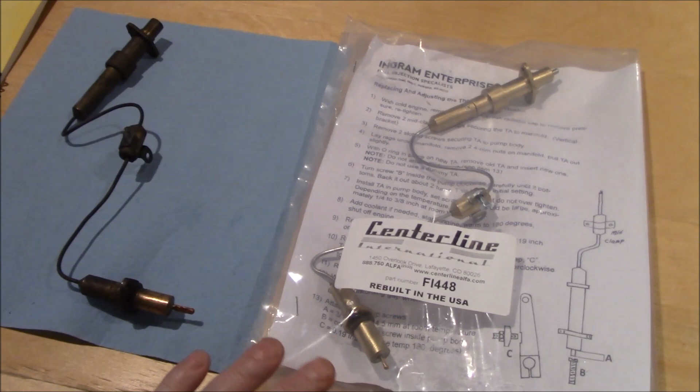All right, a little indoor project tonight. It's February the 1st, 2022, and we've got our brand new rebuilt thermostatic actuator back from Centerline Alfa. It's actually being rebuilt by Wes Ingram, Ingram Enterprises, you can see there, and we've got a host of directions to follow through. So let's unpack that and have a quick look at it, and we'll do a little bit of a test.

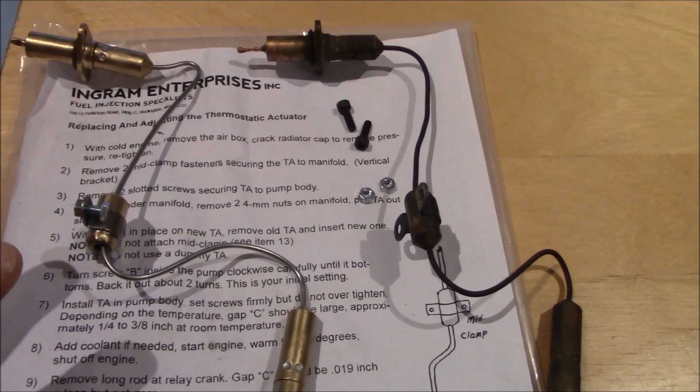All right, we've just unpacked the new thermostatic actuator, and you can see it in comparison here to the old one. And if you want to see me testing the old one, I'll put a link to the video up in the top right-hand corner of this video so you can see me testing the original and its failure. So here is the new one, and you can already see that the stick out is already pretty prominent there.

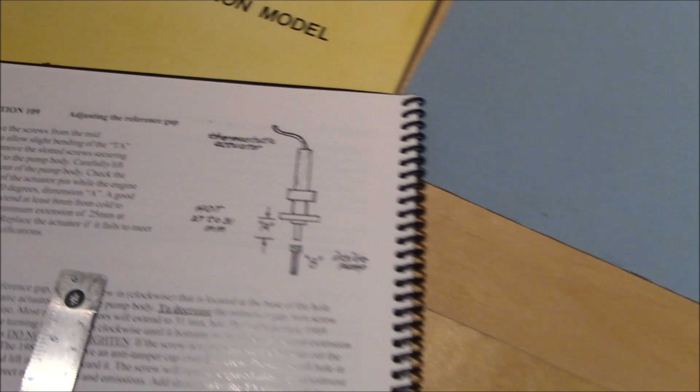So what we're going to do is the same test as we did on the previous video on the old one. We're going to test the new one and do some measurements on the room temperature stick out as it is now. And then once we submerge the end of it in some hot water, we'll actually see what the stick out actually should be. According to my Ingram manual over here on the Spica, it says this should be hot, extended, 27 to 31 millimeters. So let's see what the measurement is once we get this into some hot water.

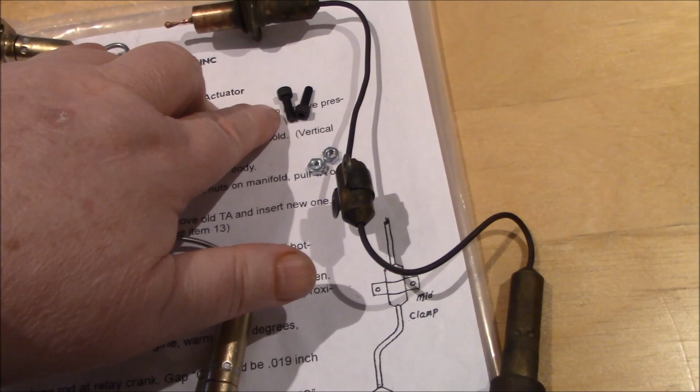Incidentally, before I go on and test this, I just wanted to point out that it's quite nicely packaged with all new hardware that you need to install this back on the car, which is quite nice. I thought I was going to have to reuse my old fasteners. It actually even has some machine head screws for the TA into the Spica body. If you wanted to go that route, it might be a little easier using the machine head screws and an Allen wrench. But anyway, it's got all of the directions for reinstalling and checking the reference gap, and we will talk a little bit more about that when we actually get to installing this on the car itself.

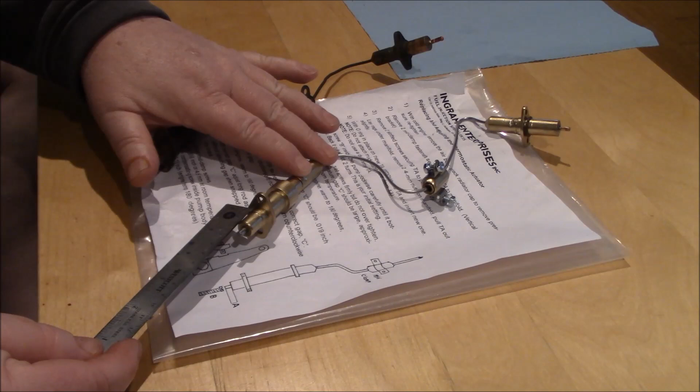All right, we've got the TA here in front of us, and we're just going to do a measurement on the stick out at room temperature. So as in my previous video, I'd mentioned that this stick out should be between 23 and 25 millimeters at room temperature. So if I take a quick measurement here from the flange, this one is actually 23 millimeters, so it's just at the minimum stick out.

So what we'll do now is we'll get our hot water and we will measure this with the other end, the temperature sensing bulb, in hot water, and see what the stick out ends up being. In the end, it should be 27 to 31 millimeters extended from this flange. So let's get the water out and we'll do that test.

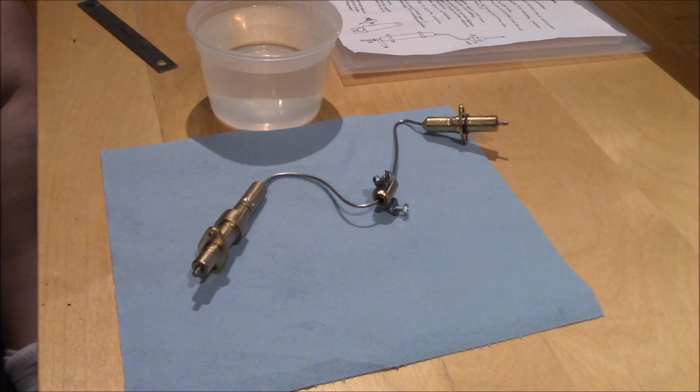All right, we've got our hot water standing by, so we're just going to stick the sensor end in, and we will watch the stick out move. And I'll try to do a little bit better job so you can actually see this in real time. So let's just pick this up. We'll handle it carefully. We don't want to bend anything. It's not that fragile, but anyway, hopefully you'll be able to see this. And let's see here if you can start to see that extending. So again, we're looking for an extension of 27 to 31 millimeters in total.

Let's take a quick measurement of where we're at. I would say we're at 28 millimeters, so it's working as it should. Hopefully you can see that. It's not exactly in focus, but hopefully you can see the stick out on that. So we're good to go as far as this working properly. So the next thing we'll do is actually install it in the car.

Well, Friday afternoon, another couple of days of snow, so I'm going to get out here and shovel again before too long.

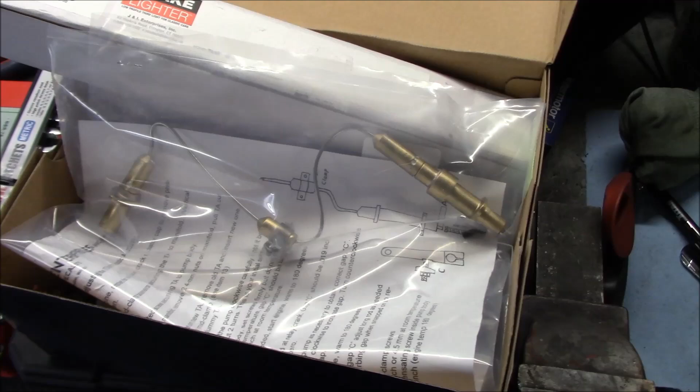Alright guys, as mentioned, it's Friday afternoon and we have a big weekend's worth of plans for the 1981 Alfa Romeo Spider Veloce project. The primary focus of the weekend is to get this new thermostatic actuator installed. And then we're going to play around with some lighting issues. We've got some third brake light options we're going to explore, and we've got some LED lighting for the taillights and the signal lights for the rear that we're going to explore, along with a few other things. So let's get started on prepping to get the TA installed into the car.

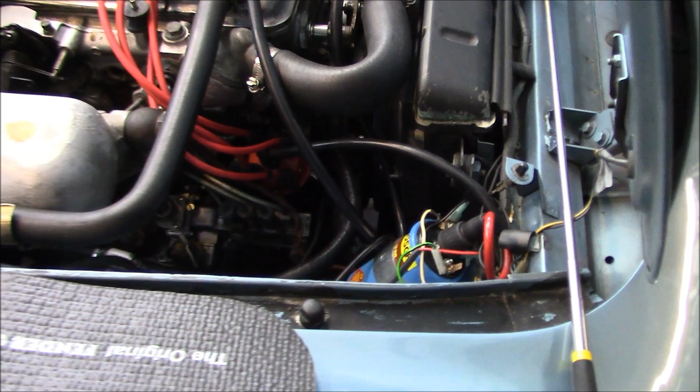All right, let's try to do a little bit of an overview of what we're trying to achieve here. I wanted to go over some of the things that are going to be a little bit of a challenge on this 1981. The first thing is this big plenum chamber here that was on 80s and 81s, I believe. This makes it a little bit more difficult space-wise to get down there and work on the Spica pump, and in particular the rear of the pump that I need to get to, and we'll show you what I'm talking about in a little bit.

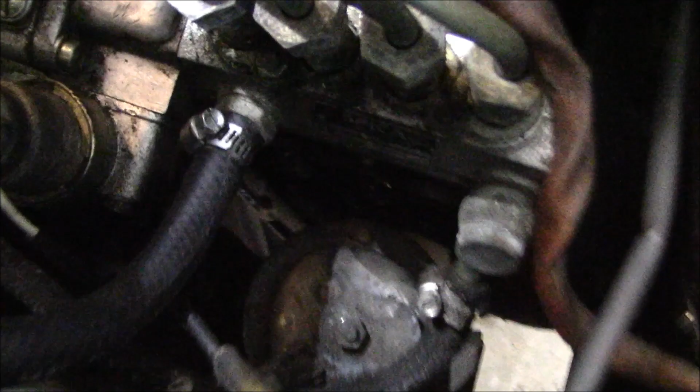But the first thing I wanted to take a look at was, and again, I'm not sure how much you're going to be able to see of this, but we'll try. I'm just trying to get to the hole where the thermostatic actuator actually goes in, and you can see a little screw in there. I believe you can anyway. On the 80 and 81, it sounds like there's an anti-tamper cap, and if you look in there, it looks like that cap is still installed, so this has never been adjusted previously.

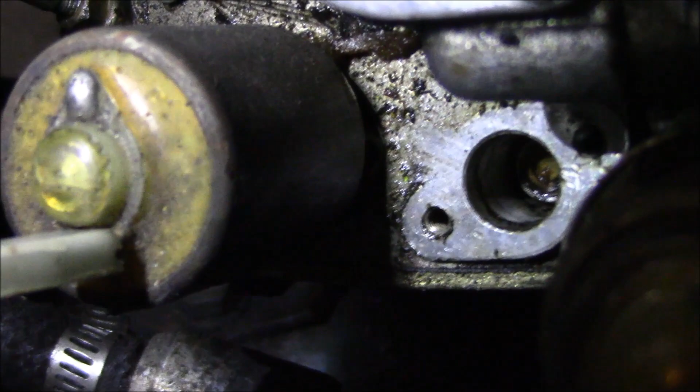Under that cap should be a slotted head adjustment screw that you can turn in and out, and that will change the reference gap at the rear of the pump that we'll talk a little bit more about in a minute. But I think you can see that. Anyway, I'm going to try to get that cap off and take a look at that, see if I can get the cap off first, and then we'll go from there.

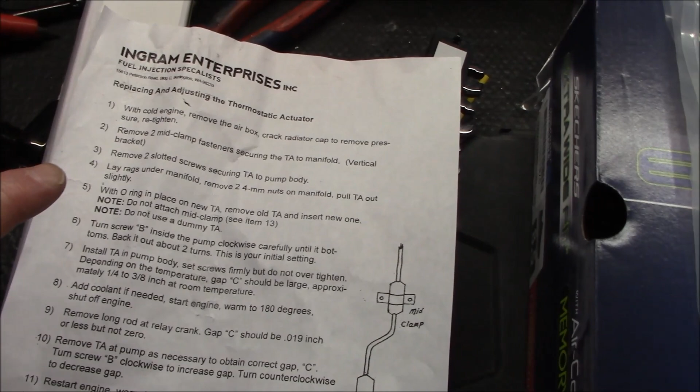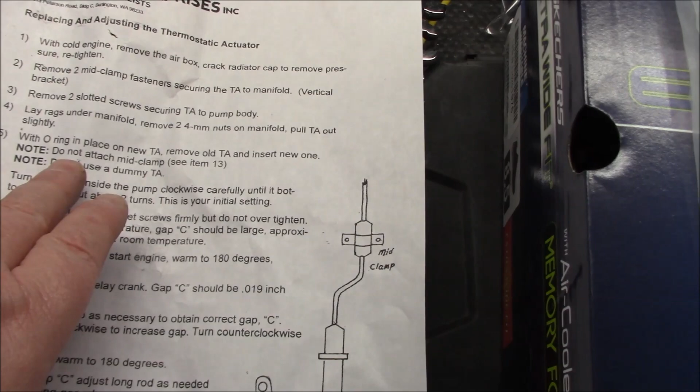All right, we're following the Ingram Enterprises installation instructions for the TA. So we're on point number 5, where we've actually removed the old thermostatic actuator, and we're going to put the new thermostatic actuator in place in the intake manifold and add the fasteners there. We're not going to use the mid clamp yet, because this may have to come in and out of the car. So we're going to skip point number 6.

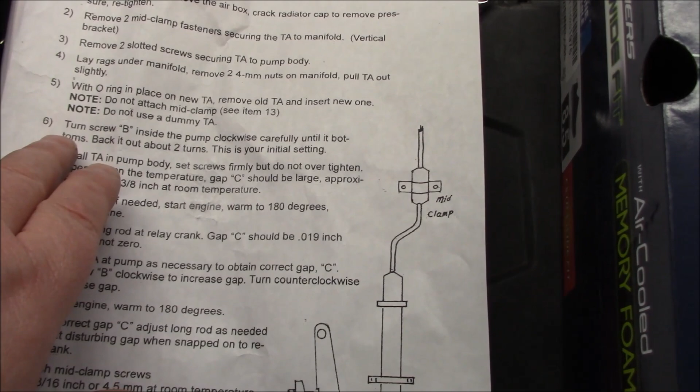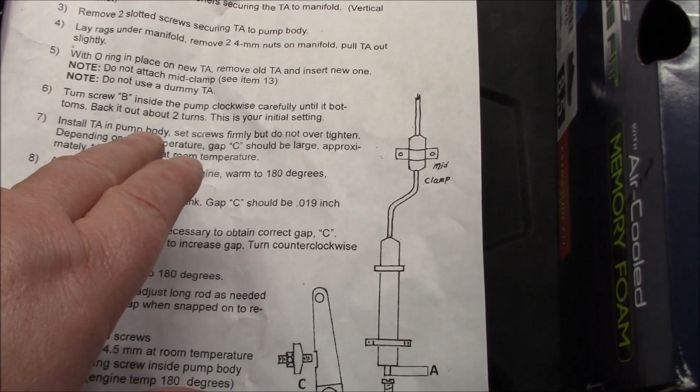I've decided not to play around with those anti-tamper screws or the caps on the adjustment screw within the Spica pump temporarily. We're going to just jump down to point number 7, and we're going to install the TA into the actual Spica pump body at the bottom. And they've sent me some nice little hex machine screws to be able to do that. So we're going to go ahead and do that, and we'll come back and give you an update.

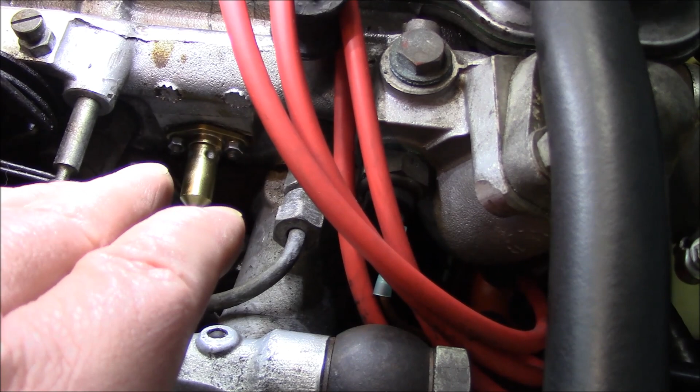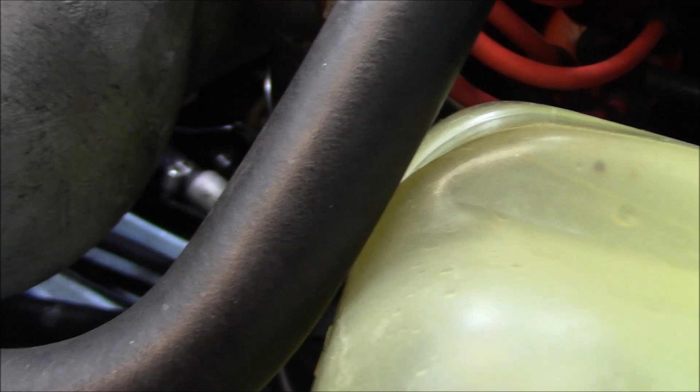As mentioned, the mid pipe clamp is not attached yet. Next step now is to put coolant back in, because we had to drain coolant to get this out. So I've bought some new coolant. I've got it sitting out in the car. We'll go grab that, add some coolant, and then we'll run this car up to temperature.

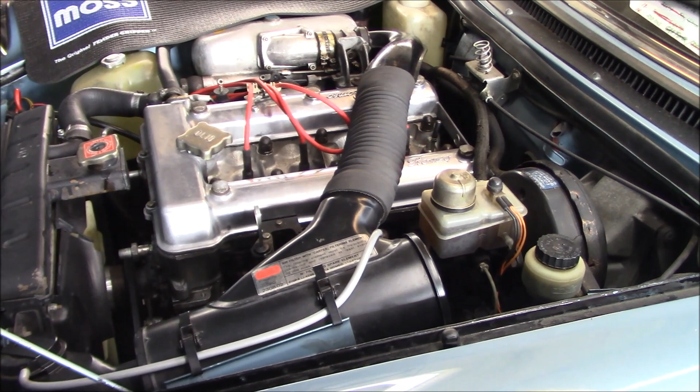All right, guys, Saturday morning, and we're picking up where we left off. Yesterday we had installed the thermostatic actuator, and then I got to a point where I wanted to start the car. The only problem was I didn't have enough fuel to be able to do that. The fuel light was staying on when I keyed the car, so I was having some low fuel pressure issues, which I attributed to not having any gas in the tank.

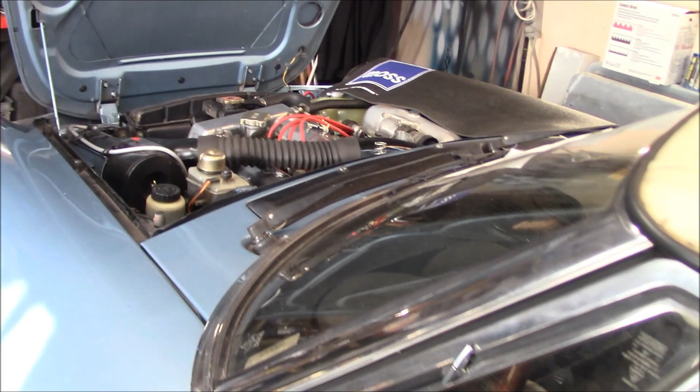So that meant that I had to go out last night, shovel the driveway, brush the car off, go get gas, and come back. And by the time I did that, it was about 10 o'clock at night. So I figured I'd just leave the cold start until today. So that's what we're going to do. So let me set you up on the camera.

It's definitely a cold start. It's 10 degrees or 11 degrees Celsius out in the garage. It's just over 50 degrees Fahrenheit. So let's see if this thing will start with the new thermostatic actuator installed. All right, not the best angle I know, but it's going to have to do.

All right, I charged the battery overnight because I hadn't charged it in quite some time, and I've been doing quite a bit of electrical testing and some cranks of the car, etc. So we charged the battery, and we've just hooked that back up. So let's get the key in here.

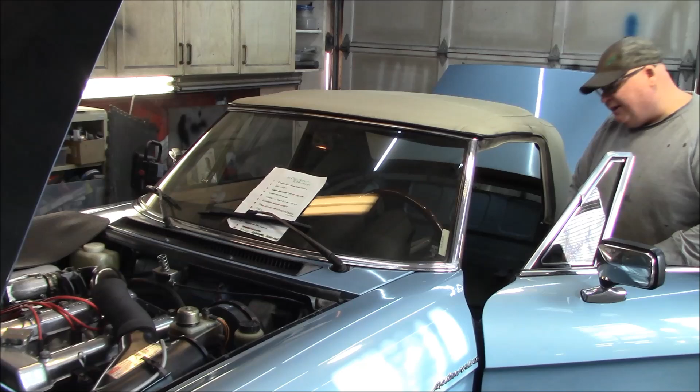And before you comment on the annoying buzzer, Doc, the new owner of this car, has told me that I can actually go ahead and take that buzzer out, or at least take the wiring off of it so it doesn't buzz anymore. But I haven't done that yet, so forgive the annoying buzz. All right. Alright, there you go.

So I'd forgotten that you need to depress the gas pedal about a quarter inch before you try to start the car. So here it is idling nicely. So we're going to let this come up to temperature. And as mentioned previously, I need to bring it up to temperature in order to check that reference gap at the back of the Spica pump. So the car needs to be plus 175 degrees Fahrenheit in order to do that. So we'll just let the car warm up here.

I'm going to crack the side door open. The garage door is frozen shut, so I can't get that door open. So let's crack the side door open. We'll let this warm up and we'll come back. And just for reference right now, I've got the throttle pulled on the dash here because we're warming the car up. And according to the manual, you want to warm the car up on the hand throttle for a few minutes before driving away.

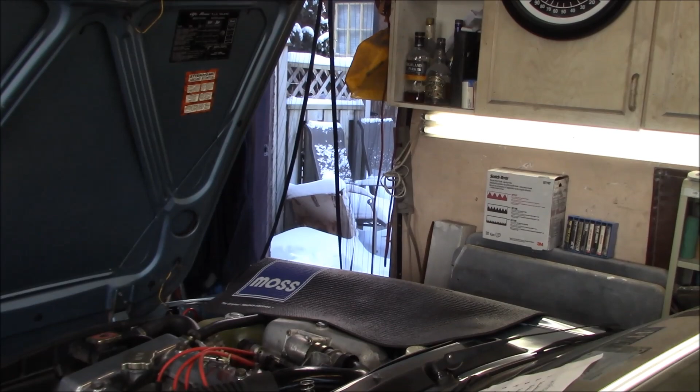So it's definitely cold out here, as mentioned. It's going to get colder now that the side door is open, and it's about minus 15 degrees Celsius outside. And yeah, I've got my shorts on out here, so it's a little breezy. Anyway, we'll let this warm up a bit before we push the throttle in and let it idle where it's going to idle at.

Alright, it's been a couple of minutes and the temperature is just coming up, as you can see. So let's push that throttle off. We're idling just about 900 now. Sounding pretty darn good, nice and smooth. Again, it's just barely heated up as well, so that's very, very good. Sounds excellent.

So what that new thermostatic actuator is doing is that when the car is in a cold condition, it sets the Spica pump up to run rich. And as the car heats up, that pin extends and acts on the rack within the pump, and it leans the mixture out. So as the car gets warmer, the mixture gets more lean. Running great. Very smooth.

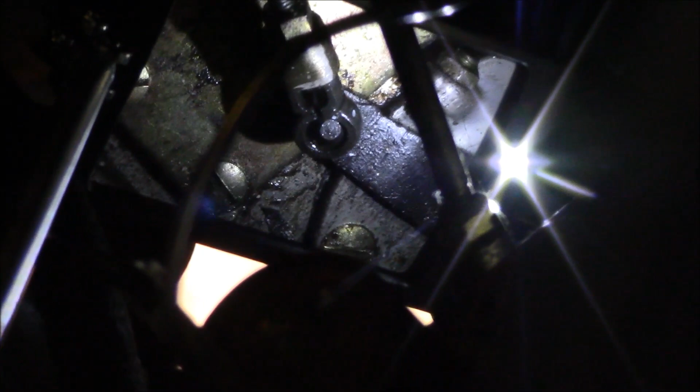Well, again, I'm not sure whether you're going to be able to see this or not, but there is the reference gap back there that we're looking to adjust. So it's going to be tough to get in there with a feeler gauge. So we got one standing by. You can see that gap is closed up significantly. The car's still not up to operating temperature. So we'll continue to run the car until it gets up there.

Alright, just coming up to operating temperature now. The car is running beautifully. Have a look inside here. I don't think it's going to get any hotter than this. Well, that's looking good.

So there's my idle. And again, this tach reads a little bit high. It's probably idling around 900. Could probably idle a little lower, but that's not bad at all. So the next step is to disconnect the long rod, which is the rod that connects the bell crank here.

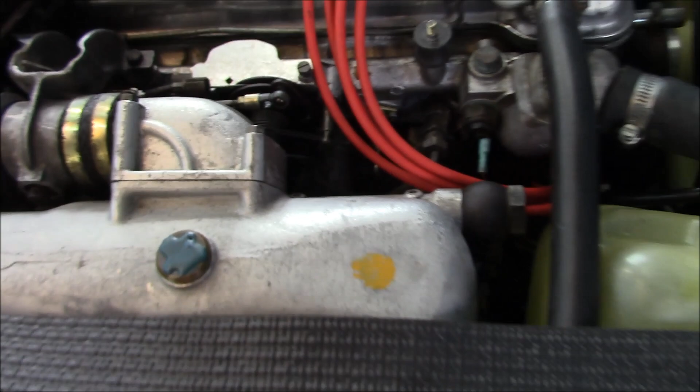Alright, I've disconnected the long rod, and that gap is almost, well, I can barely see it. Obviously I need to get a feeler gauge in there, but it looks to be almost zero at the moment with the long rod detached. Let's see if I can get a feeler gauge in there. Again, 0.19 feeler gauge. Let's see if I can get that down in there to measure it. And obviously when you reattach the long rod, you don't want to change the measurement down there, so you need to either shorten or lengthen the long rod to accommodate.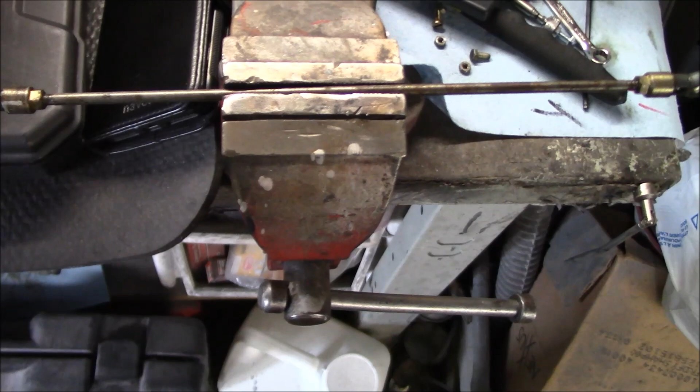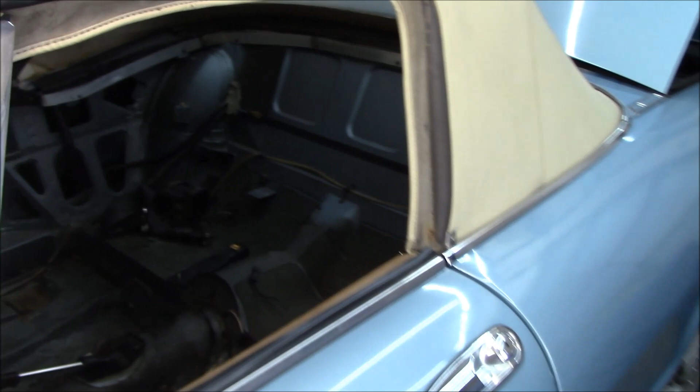Alright guys, we've got the long rod completely out of the car, and we just wanted to shorten it slightly, so we've shortened it a little bit, and we're going to go back and check the gap now and see where we're at. All right, guys, long rod back installed, reference gap checked. Seems to be running pretty well. We'll check it again. We're just running it back up to temperature. We'll check that measurement once more, but I think we're good. So idling just about right. The idle came down a tiny little bit.

All right, we'll call that done for now. I think we're going to do a little bit more tuning once we get the car out on the road in the spring. We'll do the seat of the pants test. But for now, I think we can move on. Like I said, we'll do one more reference check, and then that'll be it for now. We'll move on to some other little jobs.

All right, just before we move on to another project, I just want to mention that I did do up the middle clamp on the TA, so that's good to go in there now. And like I said, we'll play around maybe a little bit more with the tuning aspects of this once we get it on the road and do a little bit of driving in the spring. But for now, let's move on.

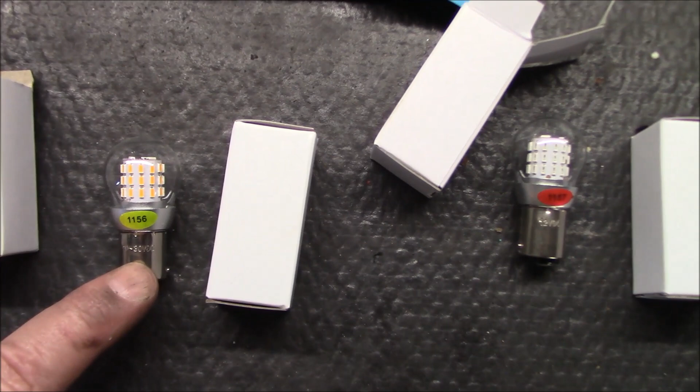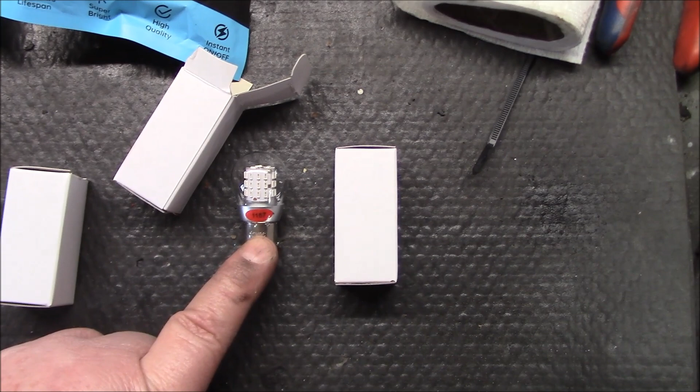All right, guys, we're just about to start the LED conversion in the rear of the car. So I've got a couple of different styles of bulbs here from a company called Alfa. These were purchased off of Amazon. We have a 1156 bulb, which is an amber LED, and you can see there's amber on the face and on the sides. And we have an 1157 bulb that is red LEDs, again, same face and sides. So the 1156 amber bulb will be used for the turn signal, and the 1157 red LED will be used for the running lights and brake light application.

I just wanted to mention from a brightness perspective that the stock bulbs are rated in candle power, and when I do the conversion from candle power to lumens that the new bulbs are rated in, the stock bulbs come out to be about 400 lumens. These are 600 lumens for both the turn signal and the running and brake lights, so significantly brighter.

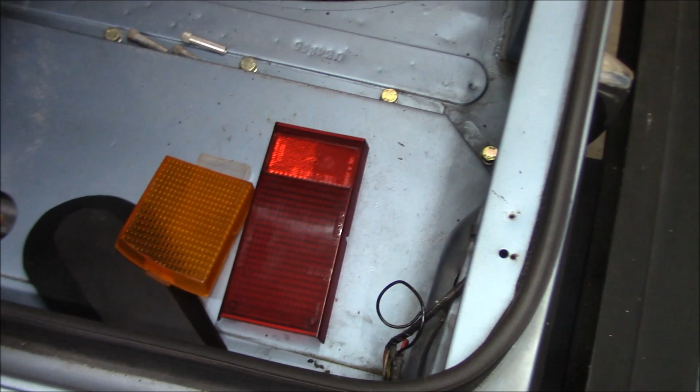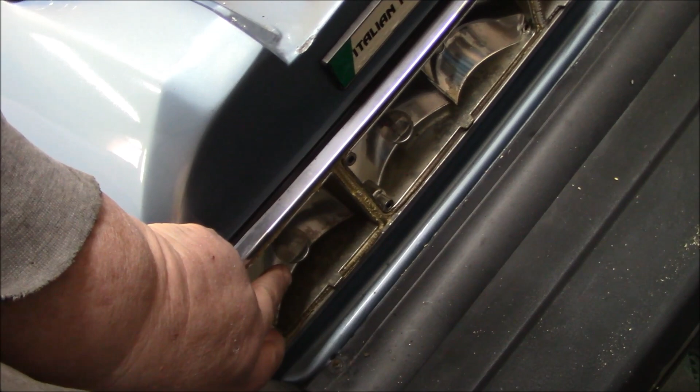All right, so I've done a little pre-work back here and removed the lenses, and if you haven't seen my previous video where I removed the lenses, all you need to do is undo these four fasteners here, these long aluminum tubes that go through the holes here in the back. There's two here and two on the inside, and that will allow you to pop your lenses off and get to your bulbs. Obviously, the outside bulb is your turn signal, so this will be the amber bulb that we're going to be replacing.

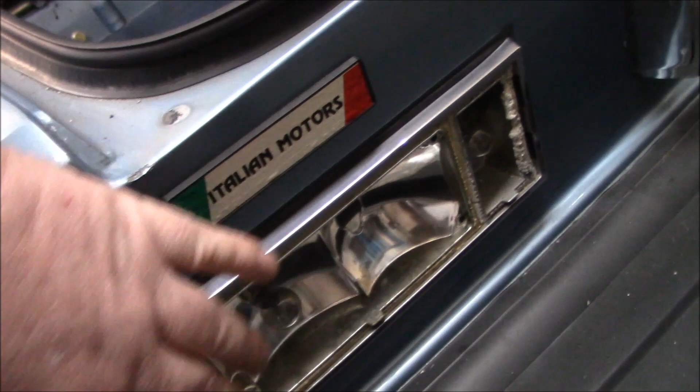And then the inside here is your red bulb, which will be for the running lights and brake lights. So we're going to be replacing these two bulbs. I'm not too concerned about my backup light. We're just going to leave that as a standard bulb. So we'll go ahead and replace these bulbs here.

Now, I'm not sure whether this is going to work or not, but we'll do a light comparison. I mean, it's pretty bright in the garage right now. I really don't want to have to go over there and turn all the lights off. It's like 4 different switches in the garage to turn the lights off. But we'll do a comparison with the lights on in the garage of the current lights. So let me turn those on and we'll have a quick look at what the current lights look like. We'll see if we can see a difference once we install the LED bulbs.

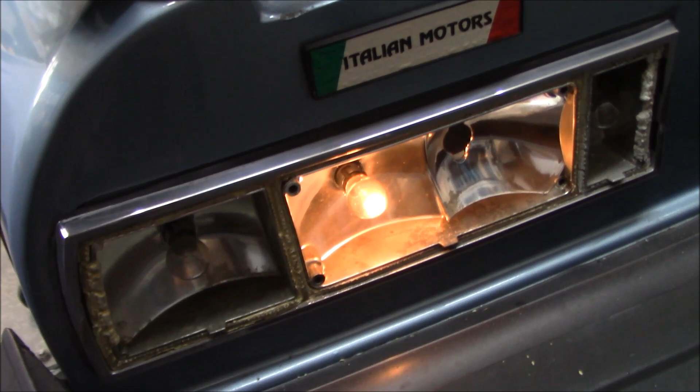All right, there is a look at the running lights. So I'm not going to be able to depress the brake light, obviously, because I'm not in the car, but you can get an idea from the running lights. And let's turn on the turn signal here. And there you can see the brightness of the turn signal. Again, I'm not sure if you're going to be able to tell the difference once the LEDs are in, but I guarantee you they're going to be brighter. All right, let's do that.

All right, guys, there's a look at the running light, and I would definitely say that's much brighter. Let's have a look at the signal light. All right, there's a look at the turn signal, and again, that looks good. It's definitely brighter. Let's see if I can set you up on the tripod, or at least I'll sit you up on something and see if I can apply the brake, and you can see how the brake lights work. All right, let's give the brake lights a shot. Looking pretty good to me from up here. All right, I think we can call that a success.

Let's move on. You might be able to get a better representation now on a white background for that tail light. How much light that puts out. It's a little bit darker here, so anyway, that's looking good. Let's turn on the turn signal. Make sure that's working on that side before we button it up. Looking good. All right, let's button things up and we'll take one last shot.

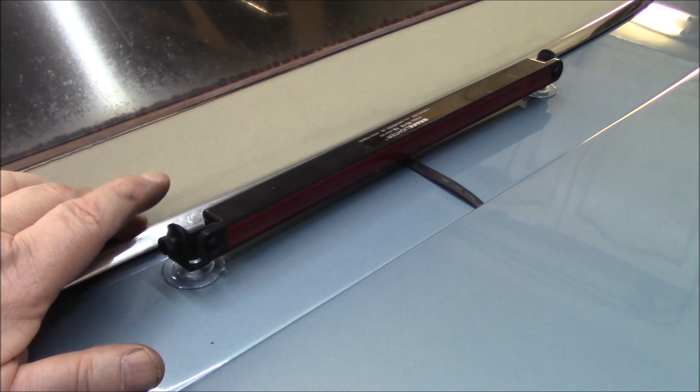I've got this one, like I said, installed in the car temporarily, and we'll go take a look at it on the rear of the car, and we'll see it light up. Alright guys, here's the first option from Brake Lighter, and as I mentioned, it's a fairly large light. The good thing about this one is it's got suction cups for feet, and it's also adjustable as far as the angle is concerned, so you can tip it up or tip it down depending on the angle of light that you want to see at the rear of the car.

So again, that's obviously going to be a removable light. I've put it where it will not foul with the boot lid or the trunk lid as it goes up. It's still going to clearance it at full lift, so you still have some room there. I like the cable because it runs flat into the trunk gap here, and I should be able to hook it up with no issues. So this one's got some positivity to it, let's say, and I kind of like it.

And again, it's temporary. It could be mounted temporarily, or you could leave it there permanently, but it should be fairly easy to remove it. I'll put like a spade connector, for example, on the connections within the trunk to remove it quickly. If he's at a show, for example, and he doesn't want to show that light, then he can remove it. So anyway, let me show you this lit up. It's fairly bright, and that's exactly what you want, obviously. And that is the highest location I can mount it here at the rear of the car. So let's have a look when it's lit up.

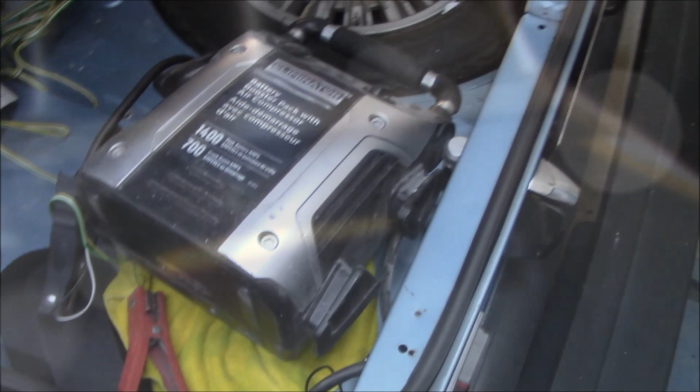All right, we'll check this first light out, and we've just got my booster pack in here with that wired up. So let's crank this on, and you can have a look. It's got a good brightness to it at the rear here, so this does have the functionality to actually work as left and right turn signals as well. I don't think we want to do that. I think we just want to maintain this as a third brake light. So it's nice and bright. Even in the bright garage, you can obviously see that's quite bright. So that is option number one. Let's go to option number two.

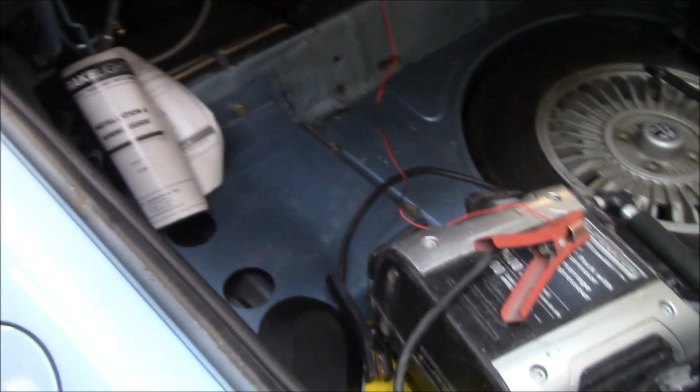All right, the next light is significantly smaller. This is the one from Watson's Streetworks. So they do street rods. So let's have a look at this one. Let's fire it up. All right, there is the one from Watson's, and as mentioned, it's significantly smaller than the other one. It is magnetic, so it can be placed pretty much wherever you want it.

The only thing I don't really like are the wires coming out of the back of it. It would have been nicer, obviously, if they were coming out of the front or sort of at a center, so that I could bring it into the trunk a little bit more cleanly. So I'm not really digging that. As far as the angle is concerned, it's not bad. It's not adjustable, but I think it might work as far as the natural angle of the car, the way it drops off.

So it's not extremely bright. I'm not sure if that would really get your attention or not, but there's another option to consider. It's quite small, quite unobtrusive, but is it bright enough? So there are the two options to consider.

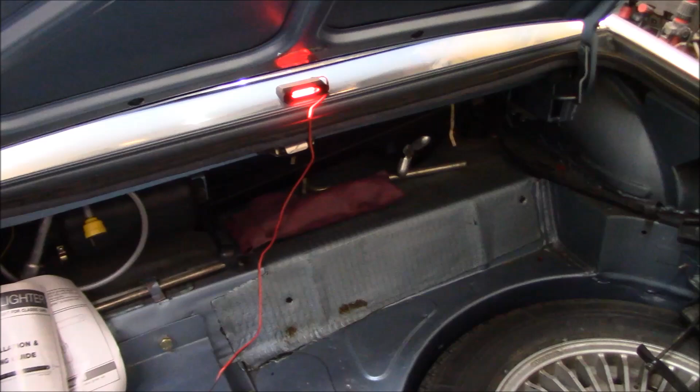All right, guys, since we have it, I figured I'd just go ahead and temporarily mount this brake light here that's kind of intended to be mounted on top of the license plate. So we've just got it zip tied in here. So you can take a quick look at this. Let's turn this on. So that's what that looks like.

Again, I think this might be a little bit low, although it's really not that much lower when you consider how close it is to the deck lid. So again, that's going to have to be a decision that Doc makes. Maybe he wants to go with something like this versus something like that, or something like the larger one that we had on earlier. Now, just a quick notation on this one. Doc also might decide that he wants to get rid of the suction cups and directly mount this.

Maybe I could epoxy some magnets on the bottom here, and maybe with a little vinyl surface protector in between, and maybe he wants to get this a little bit more closely mounted to the deck. So that's another option for this, is just to use some rare earth magnets to put this on temporarily.

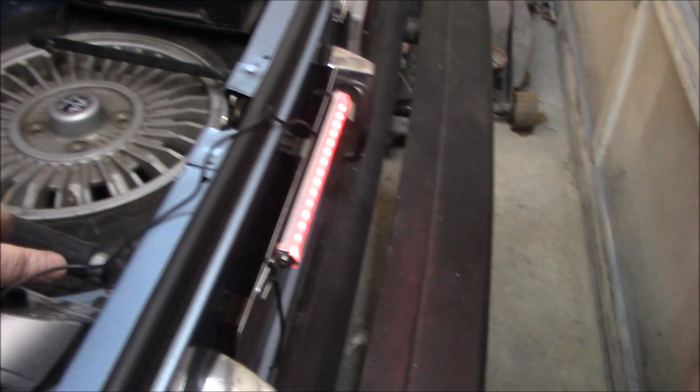So anyway, we'll see what Doc likes, and then we will go ahead and figure out how we're going to wire it up. Some options will be easier than others. This option here would probably be easiest from a wiring perspective, trying to hide the wires. But anyway, we'll see what Doc wants to go with, and then we'll go from there. Let's move on to another project.

Playing around with the stereo a little bit. And Doc has sent me another option for Bluetooth. I didn't even know this was available. So this is a Bluetooth cassette, and it's actually rechargeable. I think it's got a battery life of 6 hours. There's an on and an off button here, and there's the charging port there. You can also pair it with this on and off button as well. So we're going to try this out and see if it works.

I got my phone out here, so let's see if I can get this to pair, and let's see if I can stream some music from my phone using the old 1981 cassette deck. That would be cool, wouldn't it? Let's see if we can get this to pair. So apparently you hold the on-off button until this starts blinking blue and red. So it's like 6 or 7 seconds, I believe. There's the on.

Now it's supposedly in pairing. So let's see if I can find this on my Bluetooth. There it is there. Okay, it's connected. Let's plug her in, and we'll come back and see if I can get it to stream something.

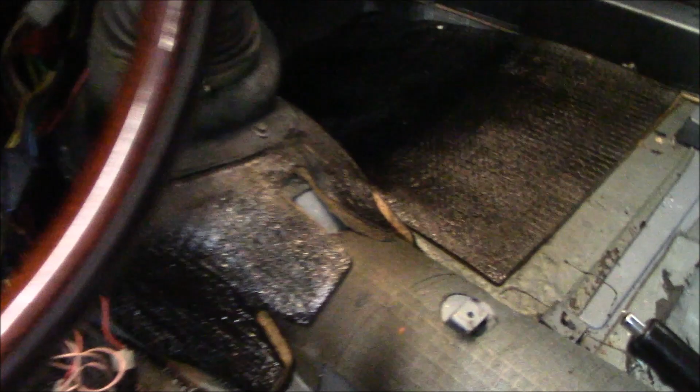Well, unfortunately, the concept I like, but it doesn't actually function. You can kind of hear it. That's streaming from my phone. I've got my phone volume turned all the way up. Got the volume on the radio turned up, and you can hear that is all I've got. Let me, in comparison, eject that tape, and you can hear the radio. So, unfortunately, that's not going to work as an option. Back to just tape deck and stereo.

One of the other things I wanted to have a look at before I go in for the night and start editing a video is the grill covers for the speakers. And as mentioned in a previous video, the stock grill covers will not work because they'll actually hit the cone of the speaker. So we were looking at other options for grills, and Doc has sent me another option in here. Now this will not work either straight out of the box. As you can see, that's still going to foul on the actual cone when we go to mount this.

However, I think I can probably modify it to make this work if I get the die grinder out and increase the inside diameter of this mount, and then re-drill these holes out a little bit further towards the edge. I think that will work. We can get around the outside of the cone, and then we can actually snap the cover on. The cover just snaps onto the outside of this. I actually like the cover. It's pretty unobtrusive. I think it'll go well in the car. So I'll ask Doc if he'll allow me to modify these, and if he will, I believe these will be okay in the car. So I'll wait back for some feedback from Doc.

All right, one more last thing before we go in and start editing this video. Carpet samples. They have been ordered. Apparently they were shipped last week. They are on their way. They're coming from California, and as we know, shipping can take a little bit longer these days in this current environment. So not sure when they'll show up, but that will be the next big decision we need to make on this car, is the carpet color. So once we get those samples in, I'll share them with you, and you can weigh in on the carpet color.